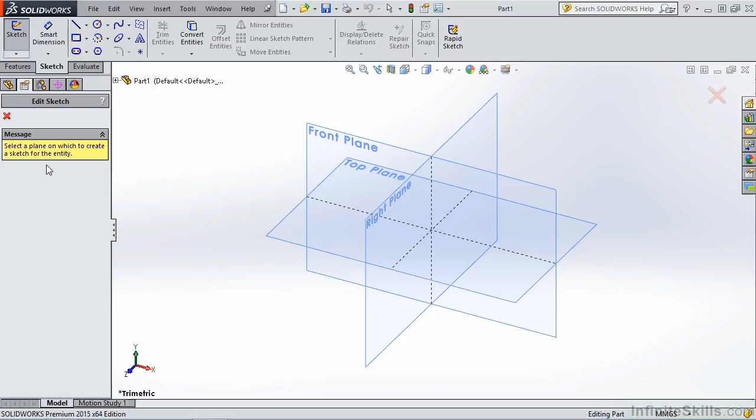Now let's begin a new sketch. I am going to select the sketch icon. The Property Manager opens, prompting me to select a plane for the sketch. I'm going to go out to the graphics area and select the front plane.

Now let's go back to the sketch ribbon and take a look at the line command. Notice the line icon has an arrow pointing down, meaning we have additional options. If I select the down arrow, you see we have line, center line, which is also used for construction lines, and midpoint line. I am going to select the line command.

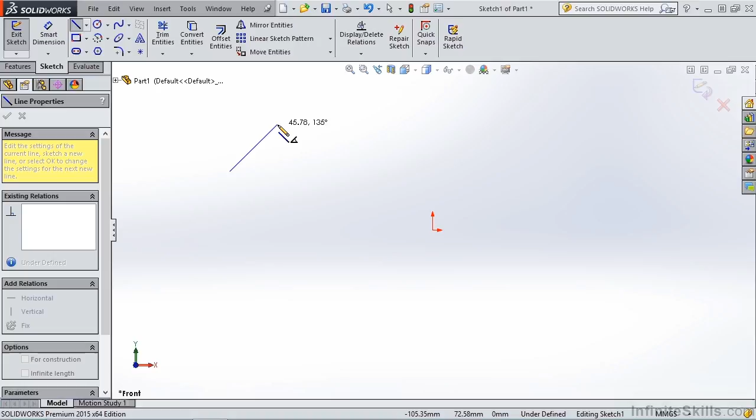Property Manager opens. I'm going to go out to the screen and left mouse click for the first point. As I move the cursor away from the first point, notice the line is stretching or growing. We call that rubber banding. I'm going to left mouse click again, and notice a line was created.

If I move the cursor, I can left mouse click again, and as I do that, additional line segments are added and chained to the previous one. Now to end out of the line command, there's a few ways to do that. You can right mouse click and click select, tap the escape key, or double click. The double click you need to be careful of, because if you do not double click fast enough, you will get another line segment.

Now let's go back into the line command one more time. If you choose not to have the lines chained one to another and only want to create one line segment, when you left mouse click, do not release the left mouse button. When you get to your second point, release the left mouse button, and notice all you receive is a single line segment.

Now let's go back to the line command. We'll select the down arrow, and now let's try center line. Centerline is also used for construction lines in the SOLIDWORKS software.

Let's go one more time back to the options, and this time we're going to select midpoint line. For midpoint line, the first point you select would be the midpoint, and as you move your cursor away from the midpoint and select a second point, that gives you a line segment based on a midpoint.

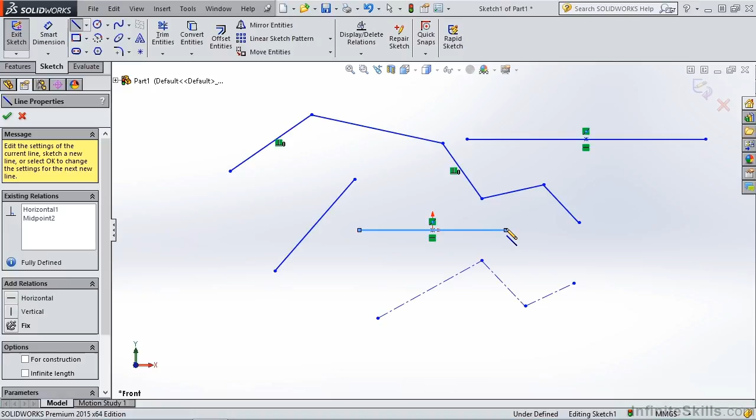Now, before we close out of this lesson, let's talk about how we delete sketch geometry in a sketch. If all you need to do is delete one sketch item, you can simply click on the sketch geometry and then tap the delete key on your keyboard. If you need to delete more than one piece, hold down the control key, select the geometry. Once everything is selected, tap the delete key, and those items are deleted.

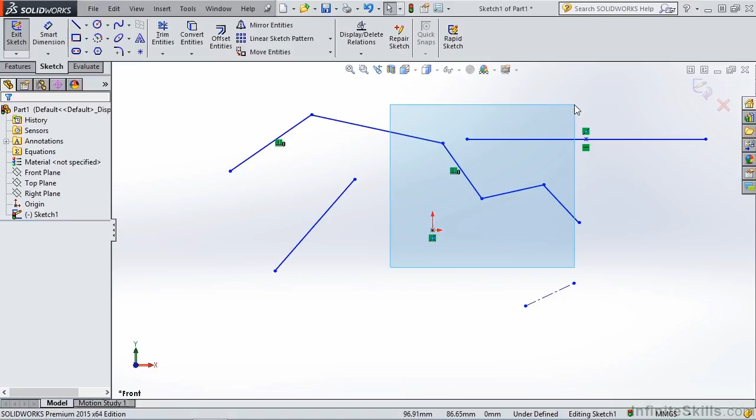Now, if you have several items to delete, we have a couple more options. If you move your cursor to an open area and hold down the left mouse button and drag up and to the right, this is called a window box, shown as a blue box with a continuous border line. Any geometry completely inside the window box will be selected. So if I release the left mouse button, only two line segments will be selected. I'll tap the delete key and they're deleted.

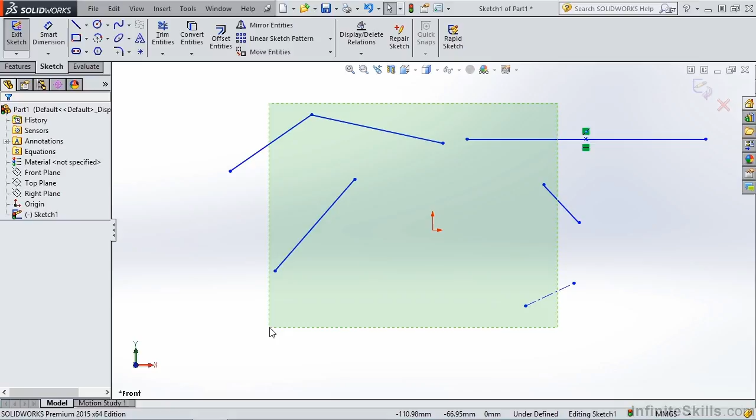Another option is if you click and hold down the left mouse button and drag down and to the left, you receive a green window bordered by a dashed line type. This is called a crossing box. Any geometry completely inside the crossing box or crossing through it will be selected, so pretty much everything on the screen will be selected. I'm going to escape out of that command. So once again, you can select individual pieces of sketch geometry, or use the window box or the crossing box.